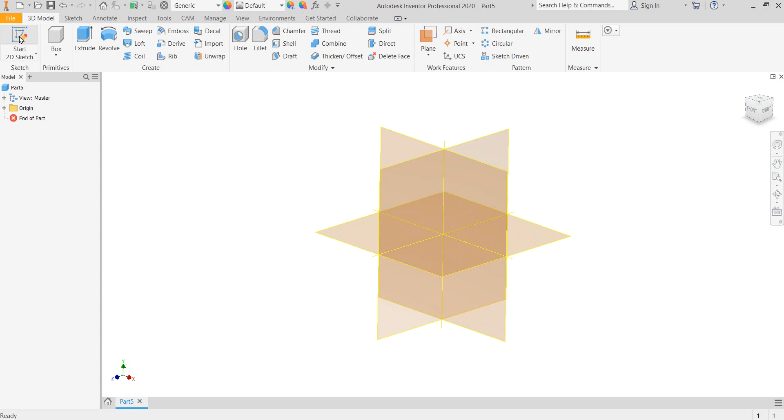Part number 5, the shaft. And this one, once again, we're going to revolve. So I'm going to start with a sketch. I think I want to put it on my XY plane. Yes, right there. And once again, we'll do a center line to help with our dimensioning.

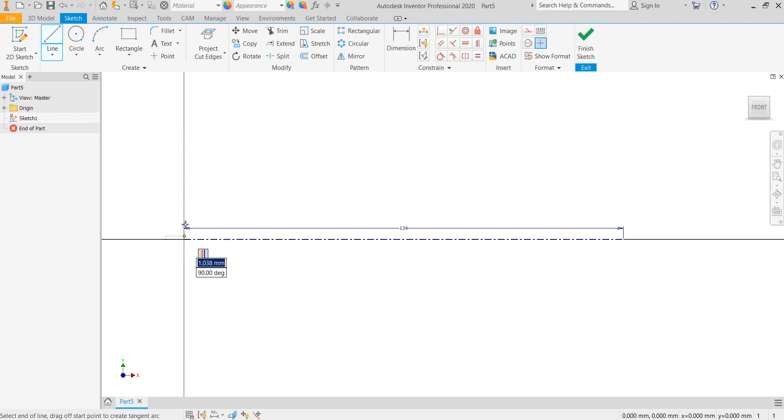And I'm going to go ahead and draw this one out 134 because that's the length of the shaft. Okay, just make it easier later. Okay, now let's turn center line off. And we will draw one side of the profile of this thing so it comes up, and then it comes over, and then it goes up, and over, and up again, over, and down. Whoop.

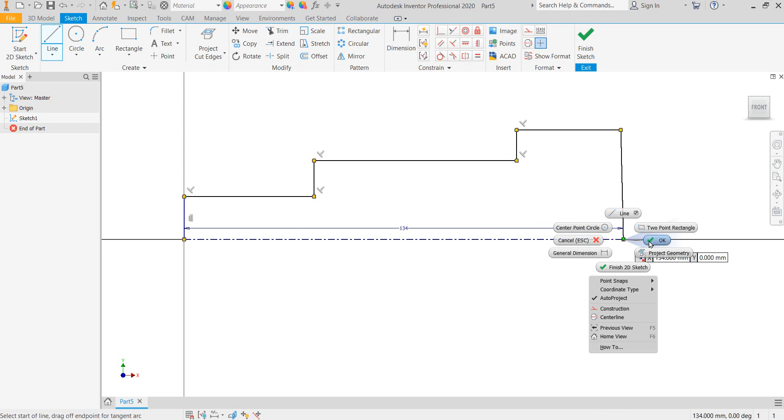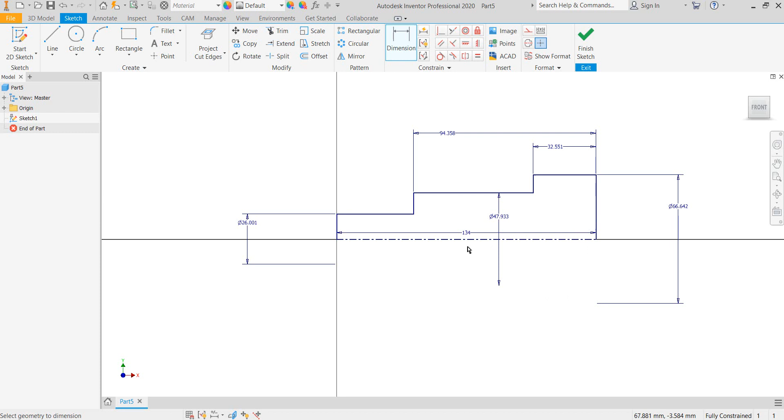I didn't get long enough there, so let me put a perpendicular right here. All right, and now we will dimension this thing by the book. We've got diameter, and we've got a length of that, length to there, and then of course an overall length, which is 134. So get those dimensions fixed up and then we'll be back.

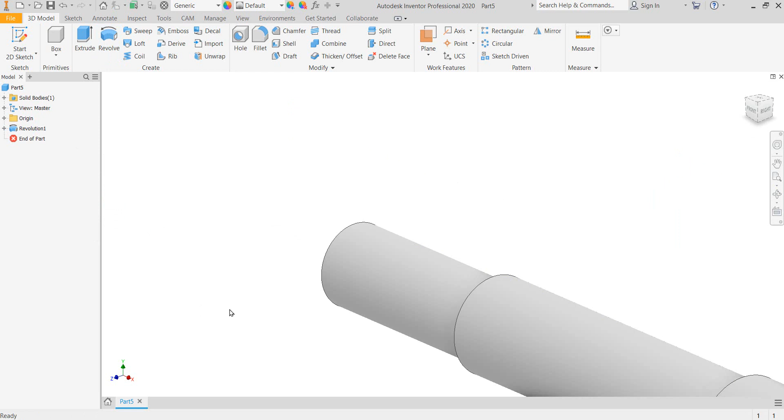I apologize, this dimension here was not a baseline, it was just a continuous. So I got those done. Now we will finish this and do a revolve and an OK there. All right, now we're going to come back into that same plane and we're going to do a sketch down here. Let's do the threads first. How about that? Let's do the chamfer and then the threads.

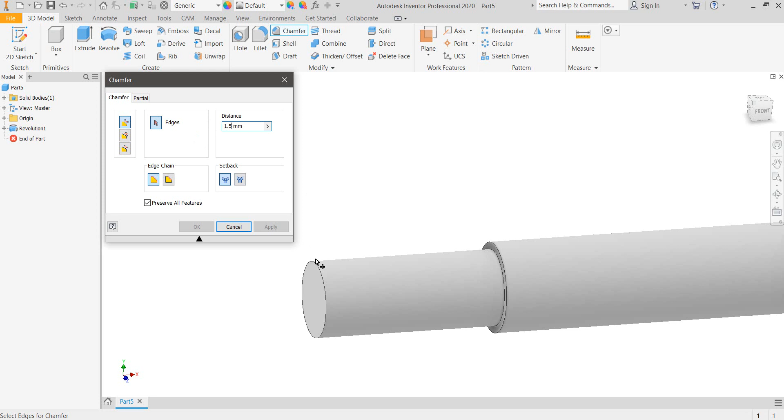So we've got a chamfer on this end that is 1.5 by 45 degrees. Right there. Okay. And then we're going to apply a thread on this surface here. And you can see the thread stops at 24 millimeters back. So we're going to go thread, and we're going to select that surface, and it picks up the diameter of the shaft, being at a 16 millimeter diameter.

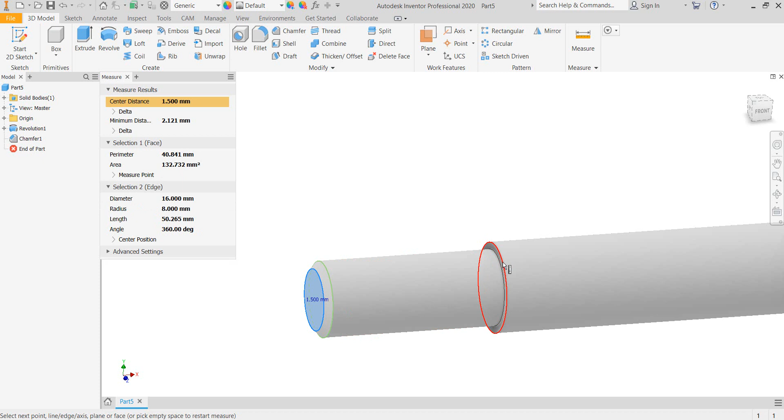So it applies that. And you can see I already put in the numbers here from where I did it before, because if you measure from this plane down to the end, you got, I think it's 37.5. That's 39. So to that ring would be 37.5. And that's kind of where the thread is going to come from. And so I just subtracted that 24 measurement out of it.

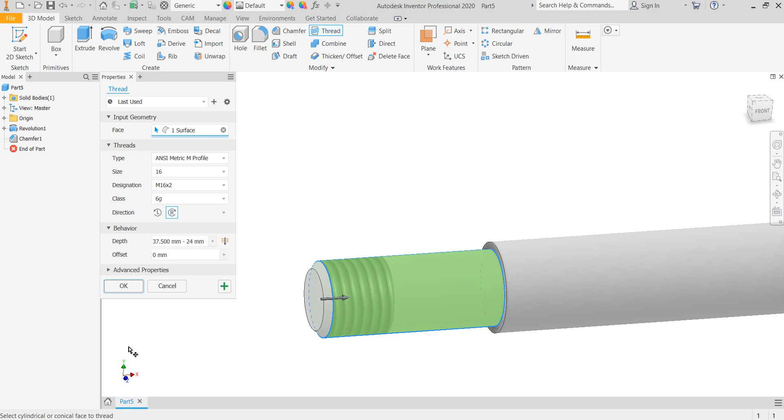And we don't need an offset. Offset would be how far back it would start from a certain point. Okay. And so there's our thread. Next, we're going to do the Woodruff key. And before I actually start it, you need to grab your textbook and turn back in the appendix. Let's see. It's appendix A66.

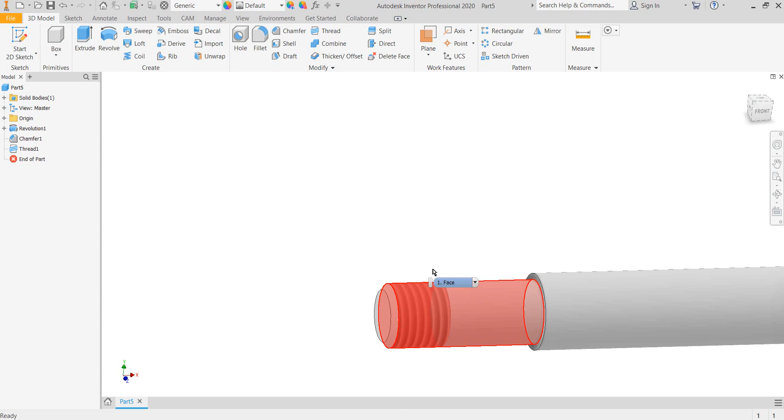I'm going to go ahead and start my sketch on the XY plane. I'm going to go ahead and start it, and then I'm going to explain what's in this table. Okay, so a Woodruff key is kind of a semicircle key. It's not a full semicircle, but it's close. And the diagram at the top shows you how the dimensions work.

We are looking for a number 406 key, which has a nominal size of 1/8 inch thick with a diameter of 3/4 of an inch. Okay, and so the other columns there give you the actual length of the key, and then the height of it. Okay, the height of the key.

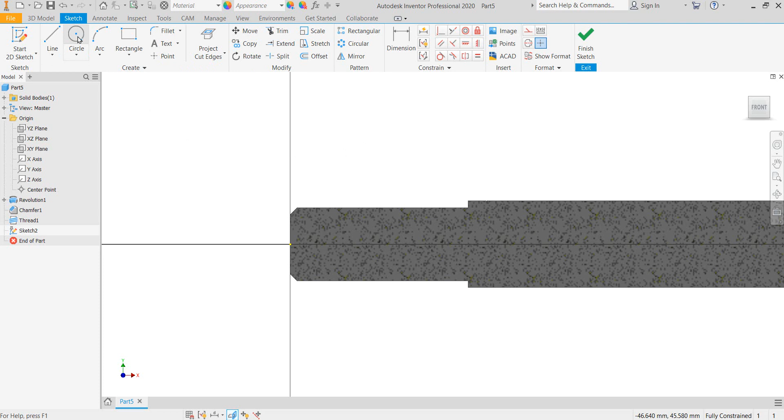So we're going to sketch it, but all these numbers are in inches, so we can mathematically convert them to millimeters. You can use a conversion calculator to do that, or you can multiply the decimal equivalent of that fraction by 25.4. That would give you the millimeters, or you can let Inventor do it for you. So I'm going to start with a circle. I'm going to draw it up here. And I know it's just going to be easier if I just place it.

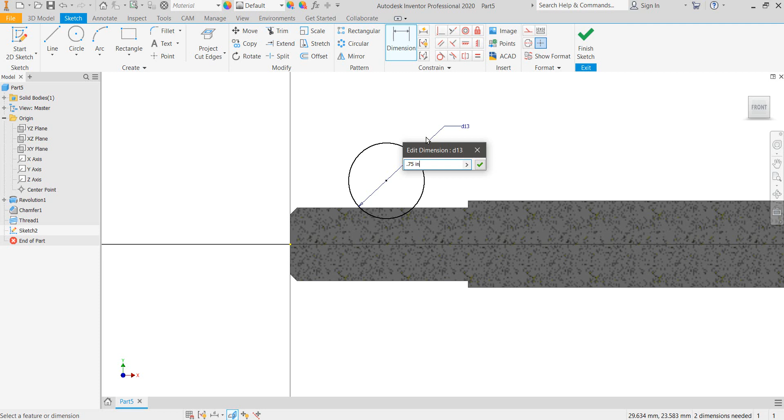Okay. I'm going to come in here with a dimension. I know that this circle should be a diameter of 3/4 of an inch, or 0.75 inches. So if I were to take my calculator that I've got in my hand here and say 0.75 times 25.4, that tells me it's 19.05 millimeters. So I could type 19.05 in. Or I could come in here and say 0.75 inch in lowercase. And now it will put in inches. Okay.

It's as simple as that. So I shall measure 19.05 diameter. How about that? Isn't that sweet? Okay, now for the height of it, you see it has a dimension E. I'm looking in the textbook. Dimension E is the height from the center of the circle down to the top of the key, or the key slot.

Ooh, wait a minute. I'm having to think right now. Because that is the size of the key. Do I need the slot to be that deep? I'm thinking. Let me pause just a moment. Okay, I apologize. I had a startling realization. The dimensions in the textbook are the size of the key itself. We need the size of the key slot because the top of the key has to stick up above it.

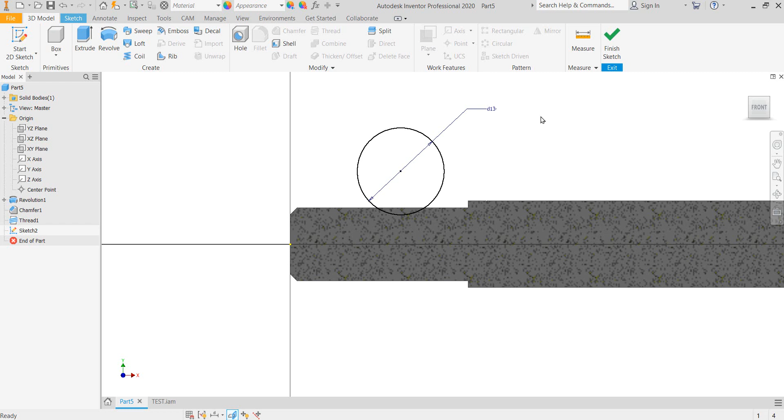All right. So we know that it's supposed to stick up, what was it, 1.7? That's on the edges. We're just going to have to experiment a little bit. So, I tell you what, I'm going to change my dimensioning back so we can see what we're doing, because this is a little bizarre circumstance here. Okay, so I know that this should be 11 millimeters back. So

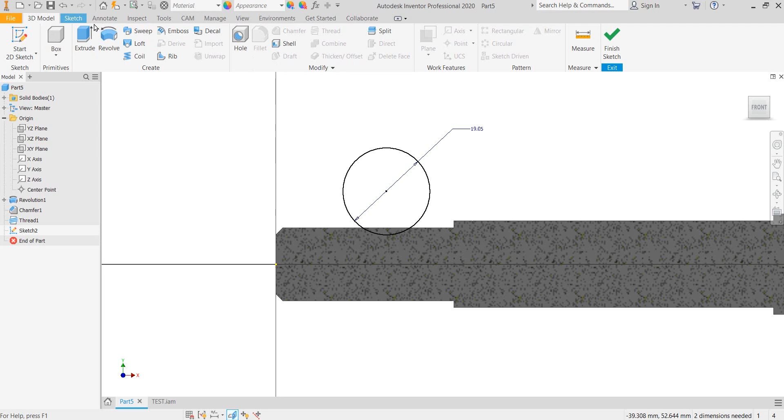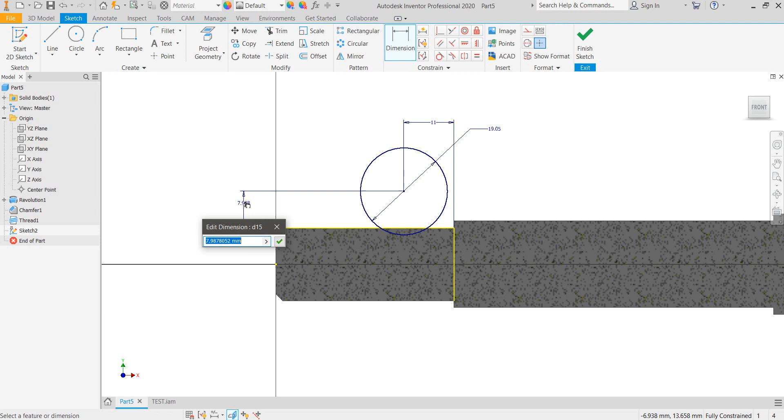All right, and if I use the dimension from the appendix, that dimension E, from the center of this to here, that's going to make it too low. But I'm going to go ahead and put that in. I need to project geometry there. And dimension E was 1/16 of an inch. Okay. So now then, if I cut this out, then I put a Woodruff key in there, the key would totally go down inside the part.

Checking, I went and pulled my own personal copy of the Machinery's Handbook. And if you will have the chance to experience the Machinery's Handbook in your 1111 class, it is some wonderful, exciting reading that will keep you riveted late at night with all of its charts and tables and everything.

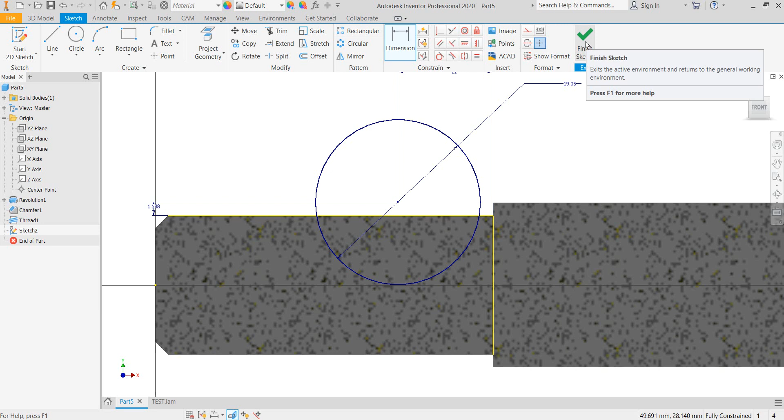And it says that the bottom of this cut to the top of the edge of the cylinder over on the side should be 0.2455 inches. But if I do the 0.2455 here, it'll be too deep still because that measurement needs to come from the edge over there. So let's go ahead and finish this and extrude. It's the bottom I need, and I'm going symmetrical, and it's 1/8 of an inch. Symmetrical 1/8 inch.

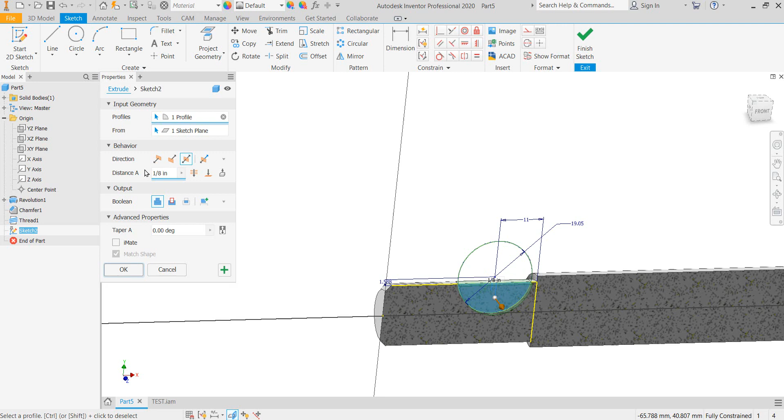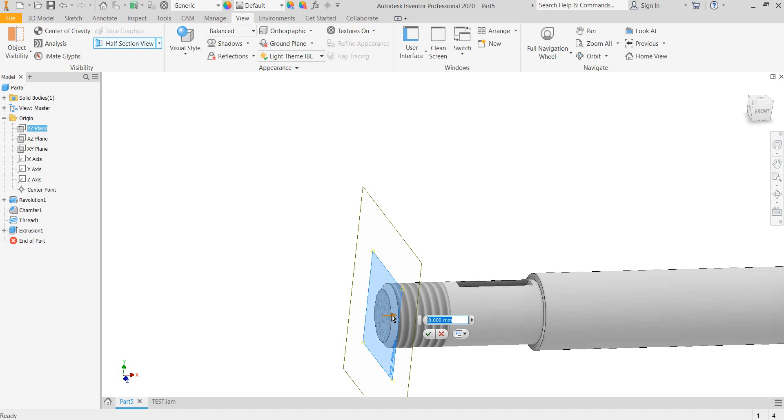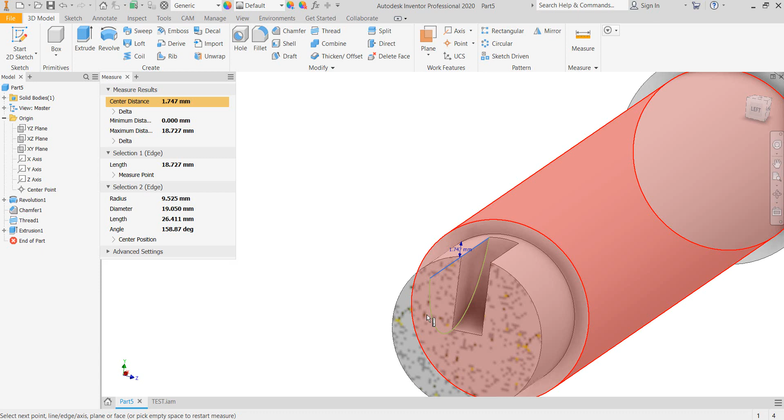What? I didn't choose cut, huh? Okay. Now let's go with a half section view. And let's pull back to about the midpoint of that. That looks kind of close to the midpoint. It'll be close enough for what I want to do. So I want to measure there to there. And it didn't measure it. I want the measurement of that edge right there. I'm having a difficult time with this. Okay, I'm going to pause.

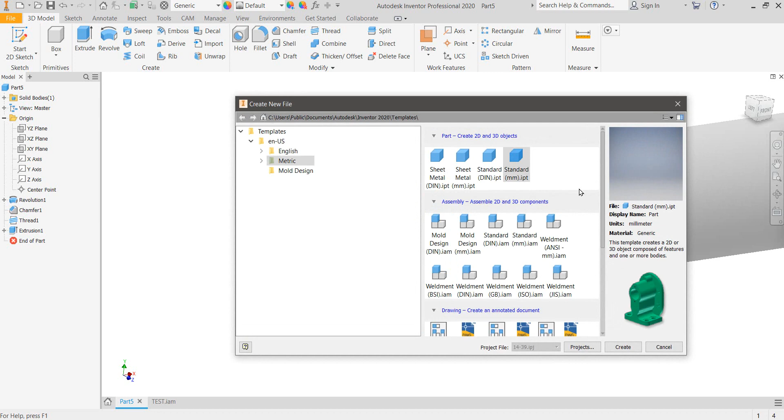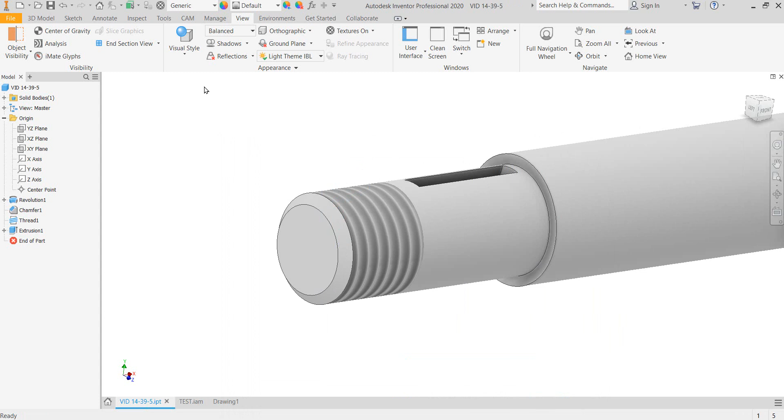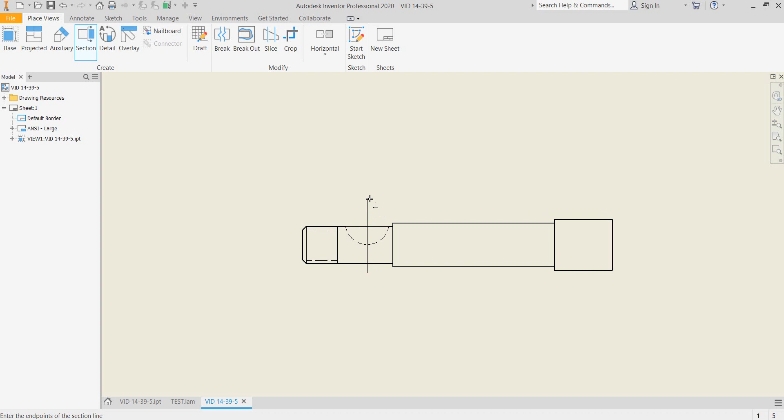A good way to test these things when you're having difficulties is to just go to a drawing, and I'm just going to pop in a regular drawing here. I didn't save my part here, so let's go ahead and save it. Okay. VID 14-39-5. Because sometimes you need to look at things and you can't really get a good view of them. All right. And I want to put a section view right through there. Okay. Now I can measure things.

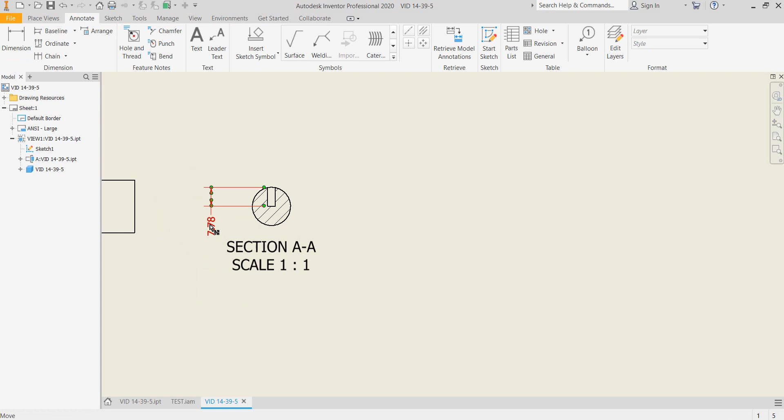And let's change our precision up a little bit. Precision, I'm going to take it to 4. All right. Now my Machinery's Handbook says that the depth of that, let me get my handy dandy unit converter calculator out here. Don't you just hate it when you open an app and you get an advertisement? All right, 0.2455. That was what I wrote down, right? Yes. And let's convert that to millimeters, which gives me 6.2357. Gotta get my pencil and write this down.

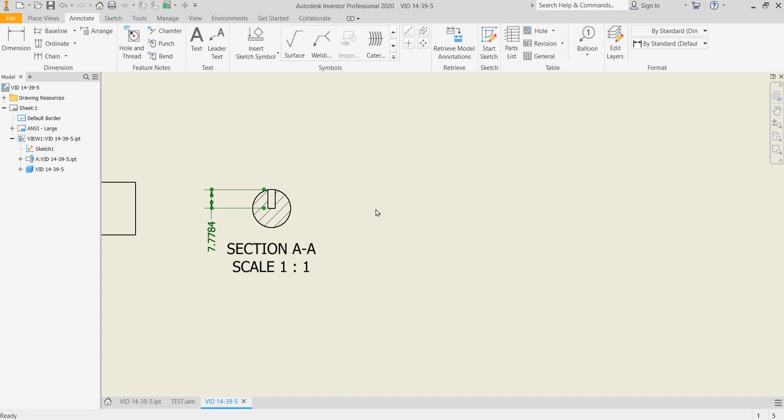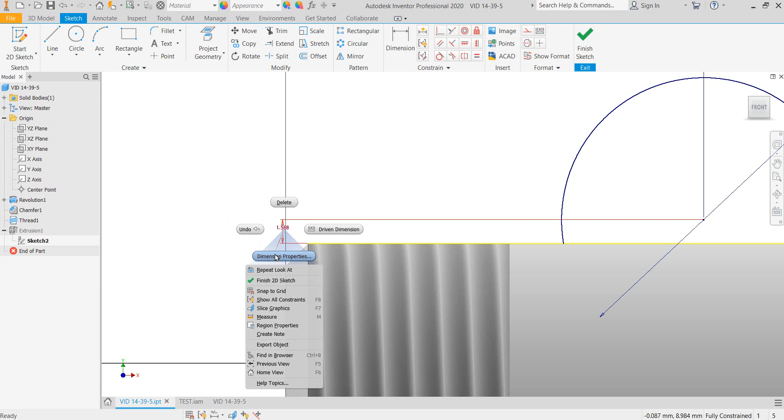So right now I have 7.7784, and I want 6.2357. So I do the math. So it gives me 1.5427. That needs to come up. So now I go back over here and let's edit the sketch. And here I have 1.5. Dimension properties. Let's bump that up to 4 since that's what I'm dealing with on my other stuff.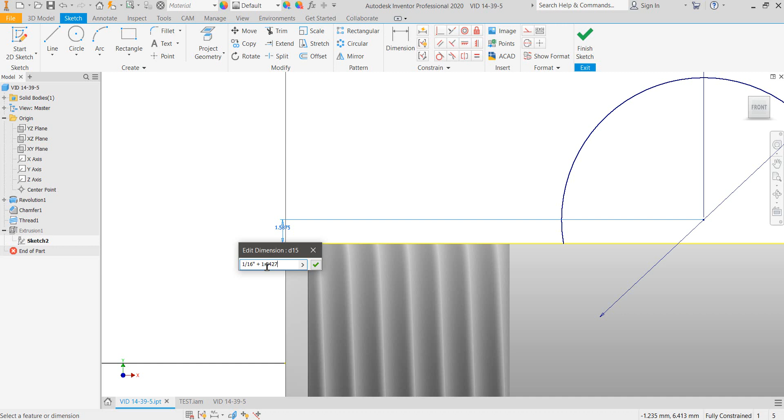All right, so I want to add these two values together. So I had 1/16 inch. I wonder if this will add millimeters and inches together. Let's see. 1.5427 millimeters. What do you know? 3.1302. All right, we're going to hold with that dimension. I have a test assembly going over on the other side. Let me just do it. 3.1302, writing it down.

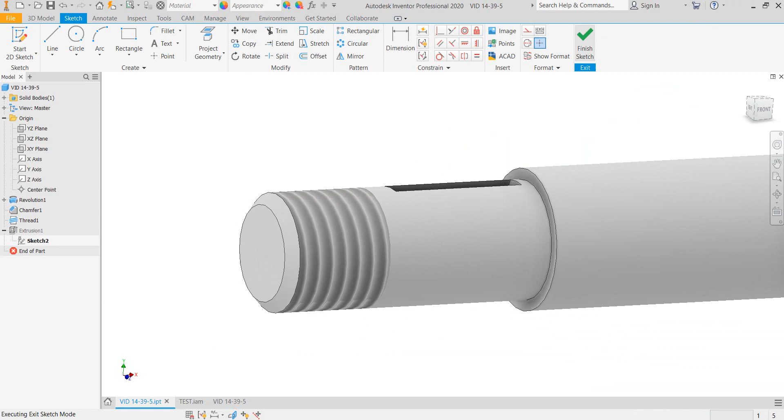All right, so here's my test assembly, and it's got a Woodruff key in it already. I'm going to edit that shaft, edit sketch, plus 1.5427 millimeters.

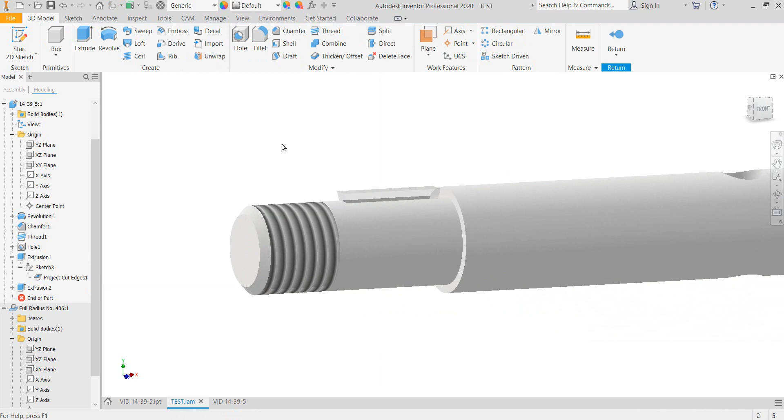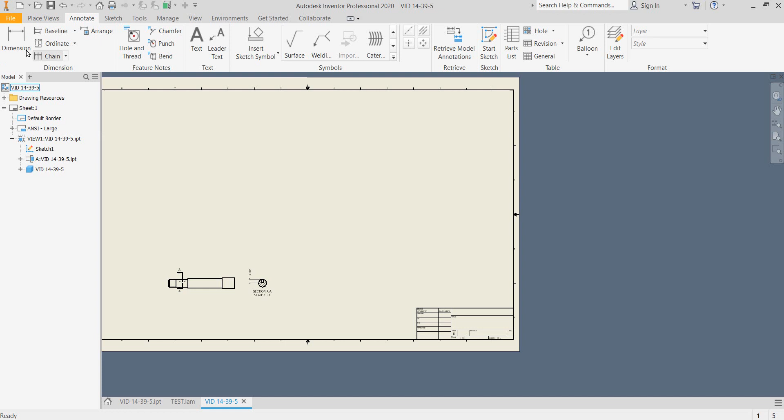Yes, that's kind of what it should look like. That's the way it should look. The Woodruff key should set up above that. Okay, so yes to all, okay. Oh, got to hit okay, duh. So I'm going to go back to my drawing here and bring in another base view since I've got that assembly, test assembly, yes, okay. And let's pop a section on it, section.

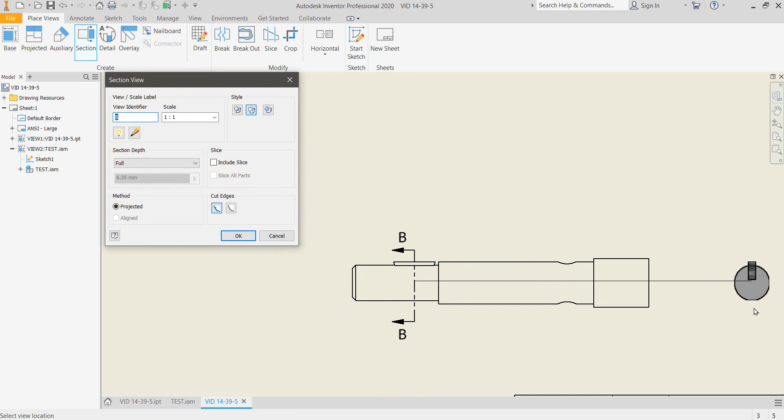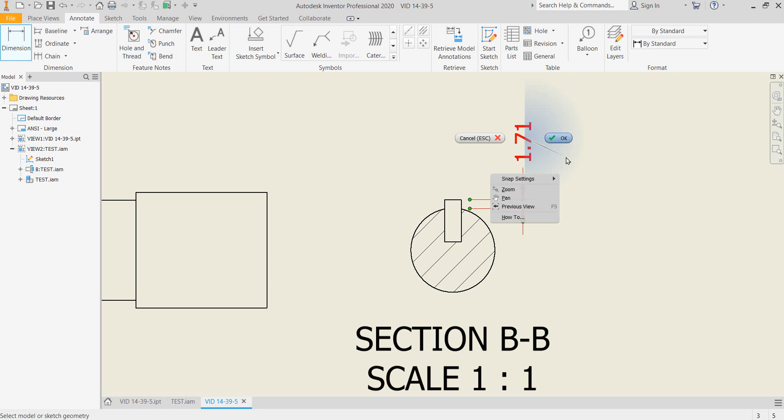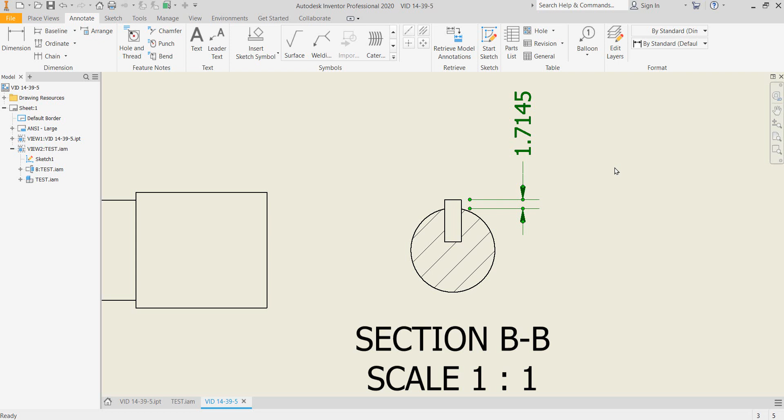Dimension, that point, 1.71. Because remember we have 1.7 in our cut through the keyway that we made. Let's bump our precision up here and see. 1.7145. That'd be a tight fit, but that's like 4/1000ths of a millimeter. Yeah. So we need to drop that down a little bit more. So let's drop it down 45/1000ths of a millimeter. Let me do it on my test here first.

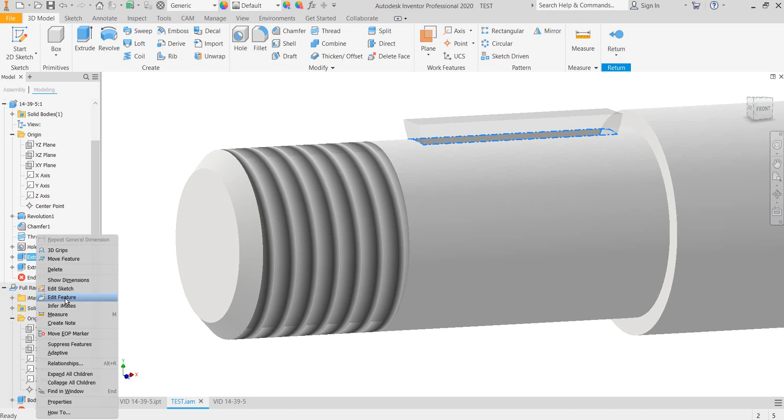So I know this is getting to be a long video, but it's a learning opportunity for you. And by golly, when you go to work somewhere, this is a lot of how you're going to do it. You're just going to play with things until you can figure out what works.

So I need to drop that down 45/1000ths of a millimeter. So I'm going to say minus 0.0045 millimeter. And update. And save. Go back to here. Hey, hey, hey. I love it. I love it when it comes together.

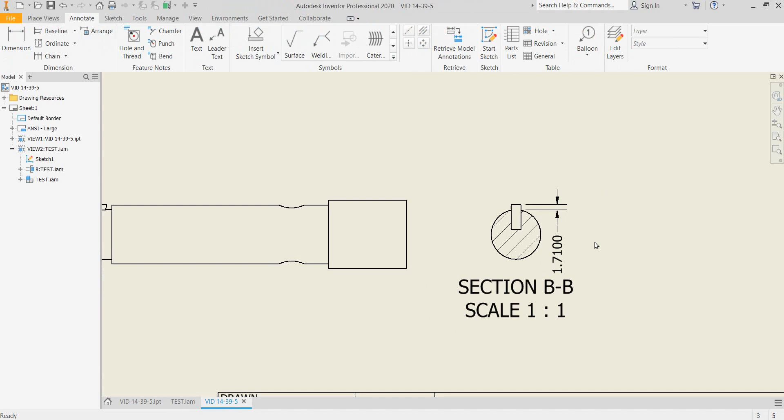Isn't that what Hannibal and Mr. T used to say? I love it when a plan comes together.

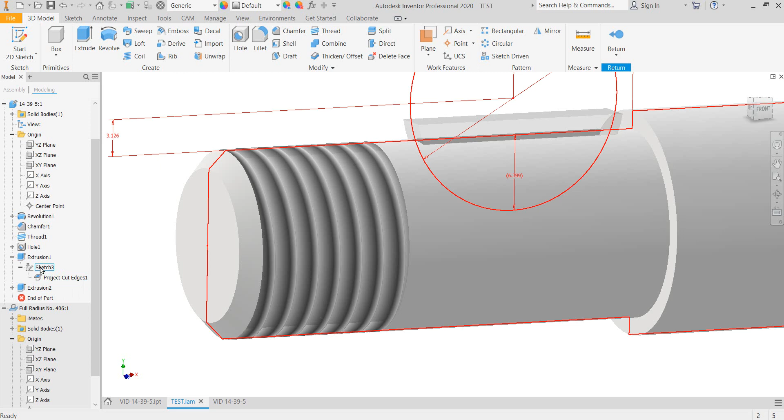All right, so now we know what that depth should be. Ooh, thank you very much. So that height should be 3.126. I'm going to check that anyway, so that I've got 4 decimal places, and we'll go with the regular number instead of the math. Well, maybe the 1/16 plus 1.5427 minus 0.0045.

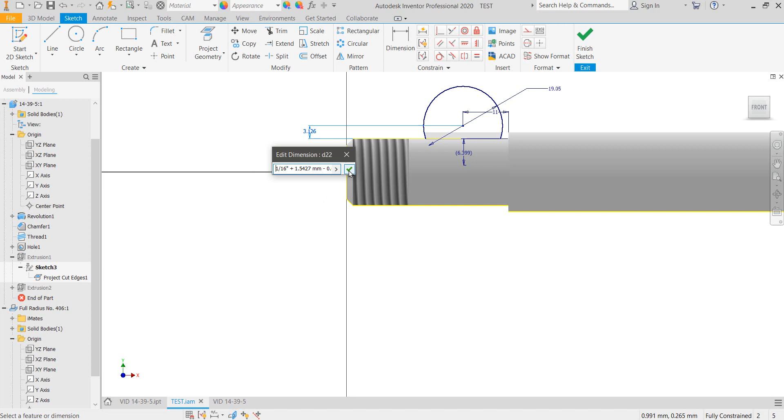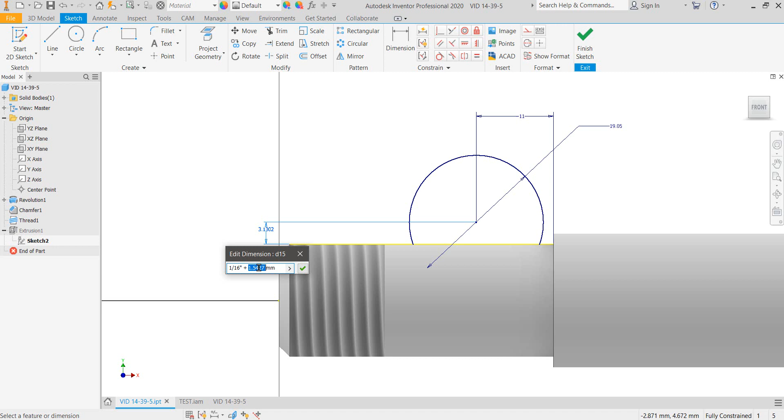Okay, so that's what we will put in back over right here. So let's edit that sketch. And let me just go ahead and subtract out the 0.0045 there. 427 minus 0.0045 makes that to be 1.5382. Awesome. Okay, so that is a Woodruff key slot.

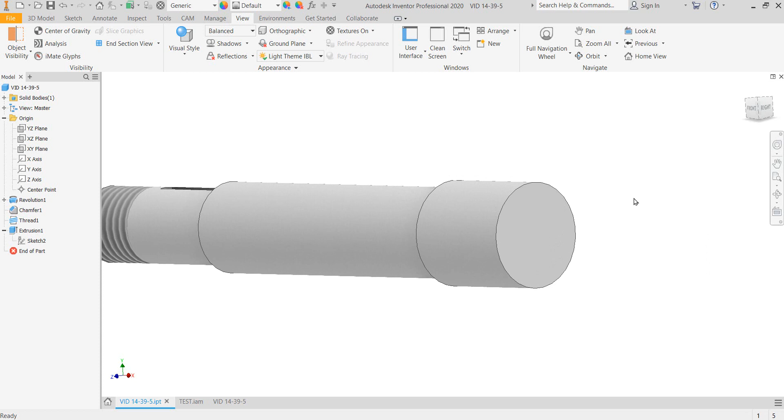Now we got a couple more holes to put down here, one of which is an NPT threaded hole. And I don't think you've run across NPTs yet, but we can model them with our hole command. We go with a tapered hole right here. And NPT is National Pipe Thread. Okay, and they're actually tapered. They're not like a bolt thread. They actually taper so that as you thread the pipe farther into the fitting, the tighter it gets. And the threads are based on a set diameter of pipe, basically. Okay.

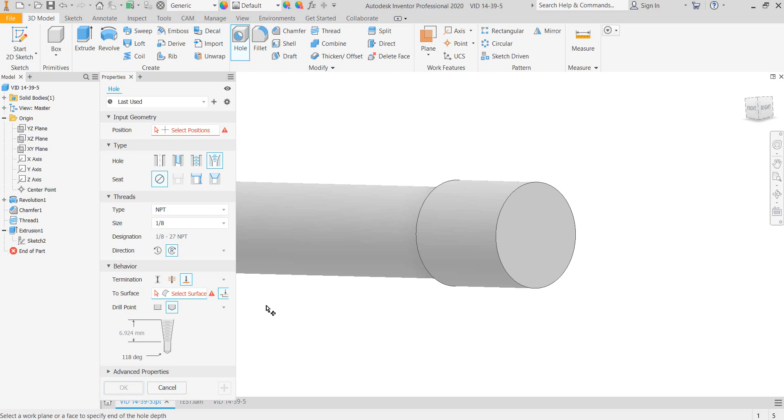All right, let me get back to my textbook here where I can see. And so we know it's a 1/8 inch NPT. It has a termination depth. It's not a through all. Excuse me, it has a distance depth. And my drill depth is 44. All that looks good. So we'll come here and make it concentric and go OK.

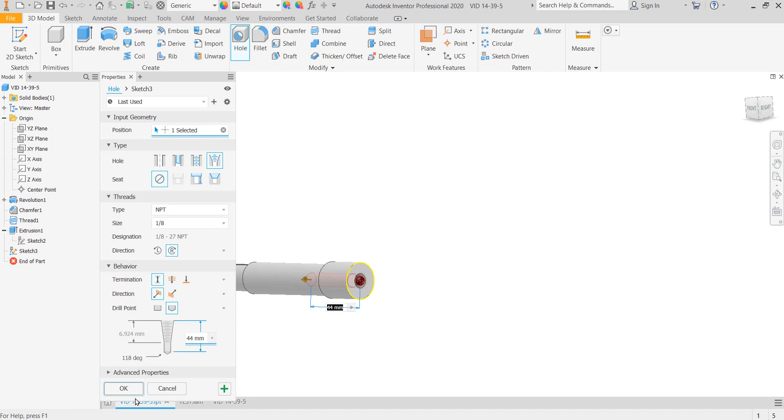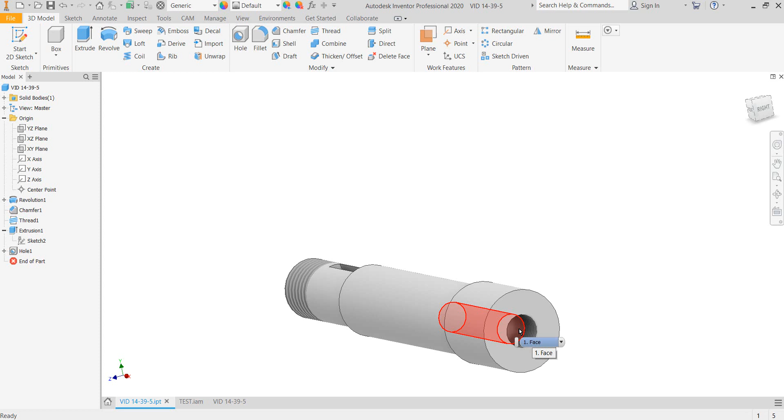Now you see the threads only go in so far, and the distance the threads go are based on the diameter of the thread. And Inventor gives it a standard diameter drilled hole, which is not exactly what's shown in the textbook. We're just going to go with what the standard Inventor one is.

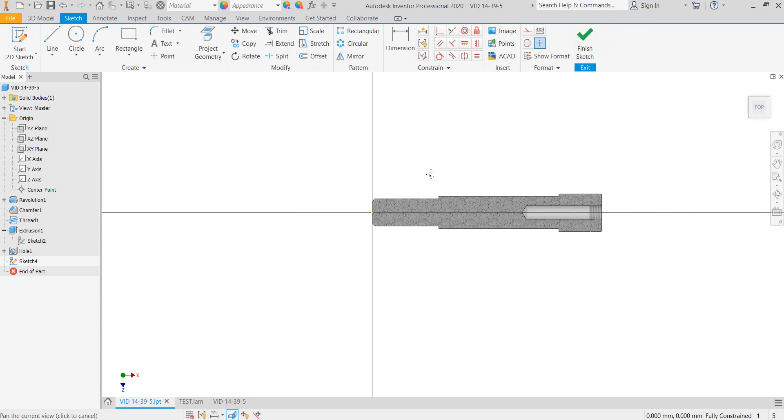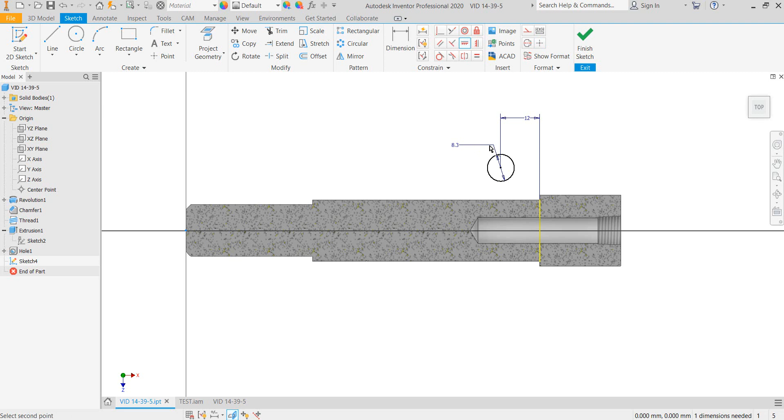Now, we have a hole that goes through here. It's an oiling hole. And so we can do a sketch on the plane that is perpendicular to our Woodruff key, right here, the XZ plane. And it's a small circle that is, what is it, 8.3 diameter. And it is located 12 millimeters from here. And it is, I'll try horizontal. I'm not sure that that's going to work. Let's see. Yeah, awesome. Fully constrained. Extrude that both ways through all. Cut. There we go. And there's our part.

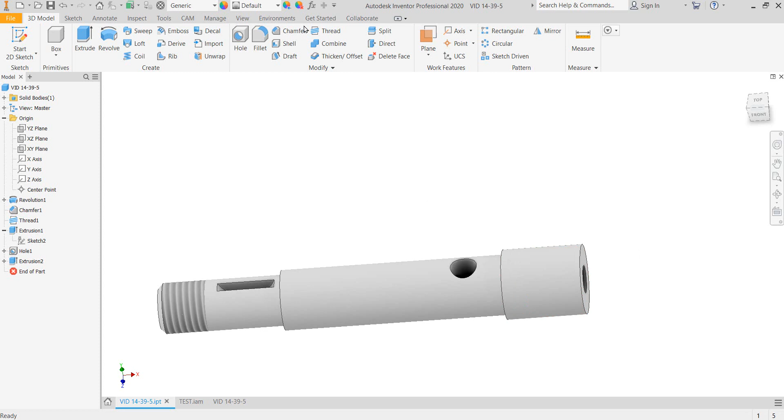I don't see no chamfers or anything like that. It's called a shaft, and it is a cold rolled steel, which is the way it's manufactured. So we will come down here and just use steel. Ooh, not steel plate. That's ugly. We'll use steel polished. Yes, that looks mighty nice. All right. And put the name of the thing in the iProperty, save it as your 1439-5.